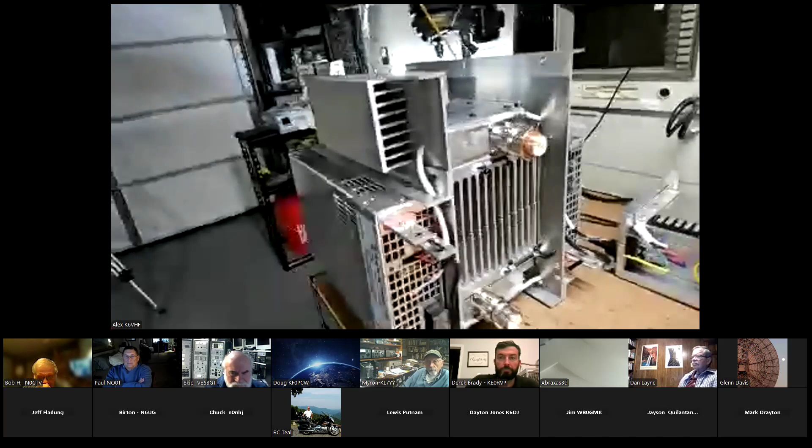So I want to show what we have right now. So I'm going to switch my camera so everyone can observe what the EVE-25 system looks like. This is the first time I'm going to do that. I'm going to switch the camera. So this, and you guys, if you have any questions while I'm talking and showing, please interrupt me and ask a question. So this is the main unit, so-called the transmit unit.

That's the heaviest one. I barely carried this with my two hands. It's about close to 70 pounds because there's a lot of metal there, and the power supply and SSPAs themselves weigh a lot. So it's mandatory two-person carry because there's no way one person can handle it. I'm just barely moving it from table to table. That's all I do. I'll add some side handles, so it's easy for transportation and moving around.

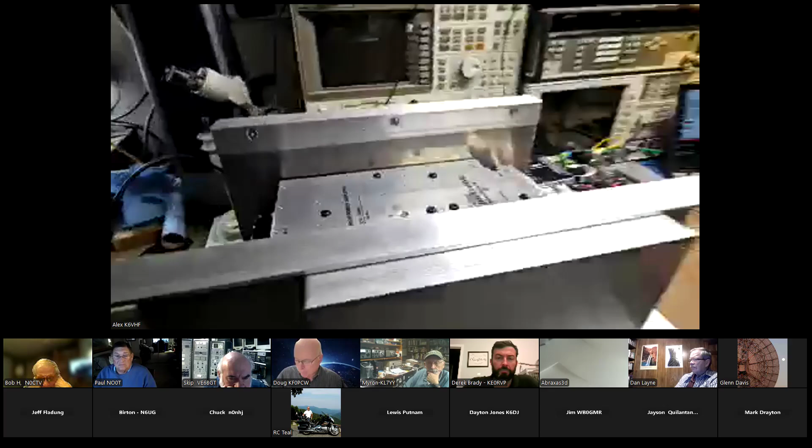But this is a unique design and a unique system. I think one of a kind, I don't think that any amateur radio operator ever built a system that's capable of doing 2,000 watts at 1296. So I'm really looking forward to the system firing up.

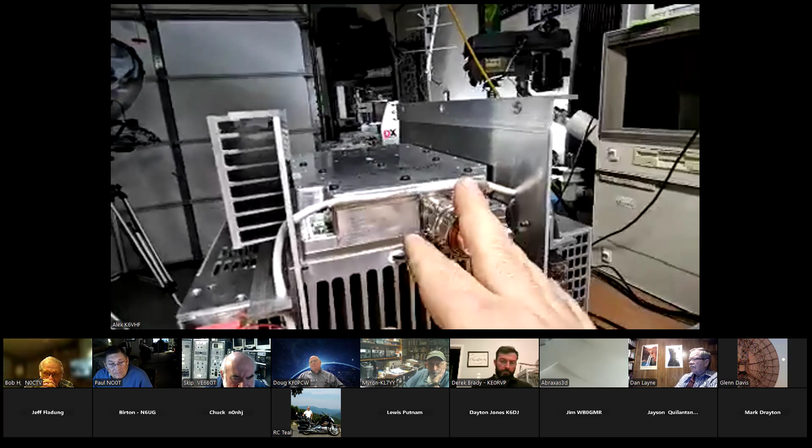I'm pretty close. I just finished wiring up today the control systems and inserting the temperature sensors, because protection is essential for me, to make sure that we're not going to find the system or the SSPAs burned. First of all, they are located in a very easy access and convenient place. So if we do need to replace them, all we need to do is unbolt all these screws and it all comes out. I didn't bury them under the metal, so that's easy in case something goes wrong. It'll take probably an hour to replace, but it's capable even in the field as well.

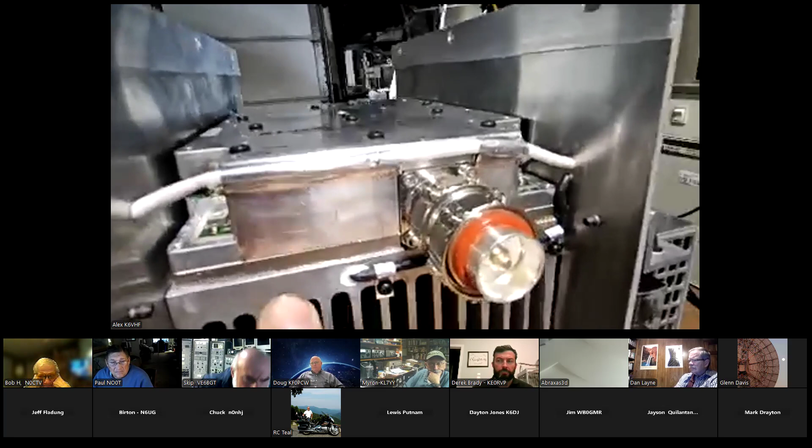So I added some temperature sensors right inside the heatsink. It's about 5 inches inside. I drilled a hole for the temperature sensors for each heatsink. So real-time temperature monitoring, and I have 8 sensors in total. This is the outputs. During the test phase, which is going to happen in a few weeks, we're going to be testing each amplifier separately until we get the nominal measurements and the calibration for the power and protection. And then we're going to add the combiner.

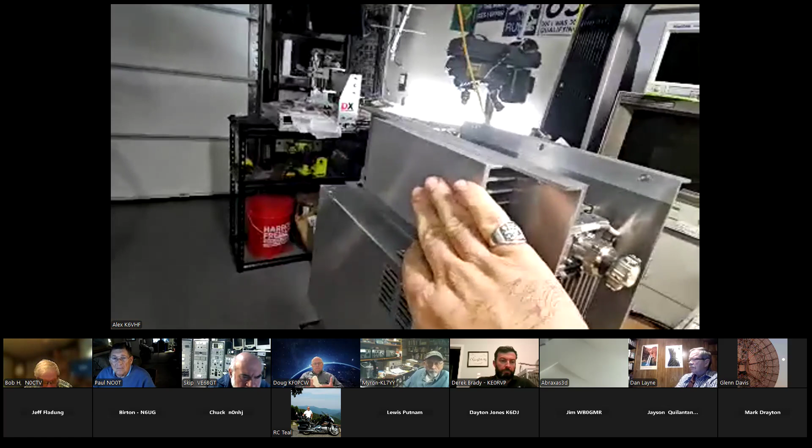I'm waiting for the driver amplifier right here. That's going to be mounted, and it's going to drive these 2 big amplifiers. That part didn't arrive yet. So that's the only part I'm missing to complete the whole assembly. The last thing I'm going to do is the combiner.

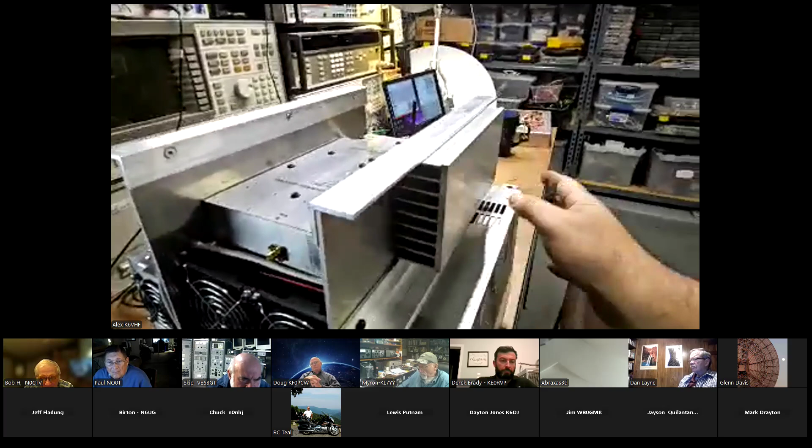Yes, there's a lot of fans in there because we want to make sure the cooling system is capable. Each power supply has its own built-in cooling system, as well as protection, which I'm going to route from each power supply directly to the control unit. And two fans are controlled by temperature sensors, so they're turning on and off when it's needed. And the other 2 turn on only when you transmit. So when you're on receive, nothing is turned on as long as the temperature stays below a certain amount. So this is the main unit.

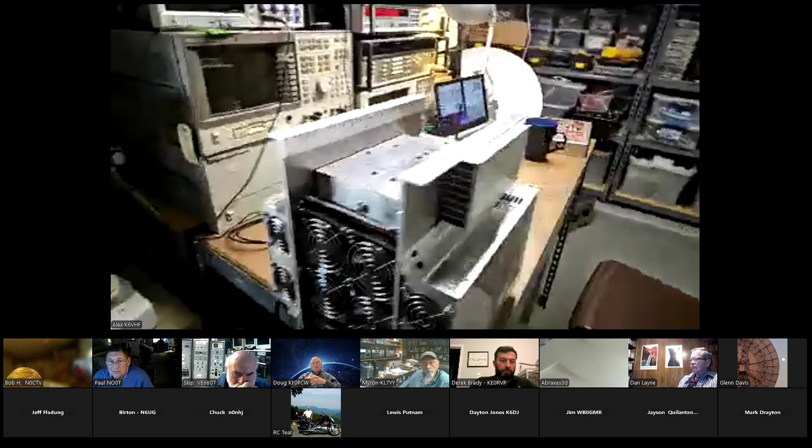I made this chassis on top so we can slide other boxes right on top of here. In case that won't fit, because the whole assembly is about 18 inches, if that won't fit in a hub, then we're going to use those boxes separately. So any questions about the TX unit?

Alex, we could use those temperature sensors for monitoring as we get close to the sun. We can see how we're doing when we track close to the sun. Absolutely, because I have 8 sensors provisioned. So I'm going to use probably no more than 6 for the assembly, because I want to measure the temperature of each amplifier itself. I want to measure the temperature coming out of the heatsink, the so-called exhaust, and also the input, which is the ambient temperature. Those are essential so we can calculate.

By the way, I also have a relative humidity sensor, so we can calibrate it to a specific amount, because I don't want the humidity to rise to a certain 90% or 80%. Am I going to cause a problem with electronics that is not protected? So the system will shut off each of the power supplies and amplifiers automatically.

I'll talk a little bit about the monitoring system later, but this assembly is unique because it has real-time monitoring, telemetry, as well as protection. Protection is sophisticated. You have multiple layers of protection. My goal is to protect the investment, so we make sure we operate, and whatever happens, it will protect itself. So I'm probably going to have 2 additional sensors reserved for anything we need.

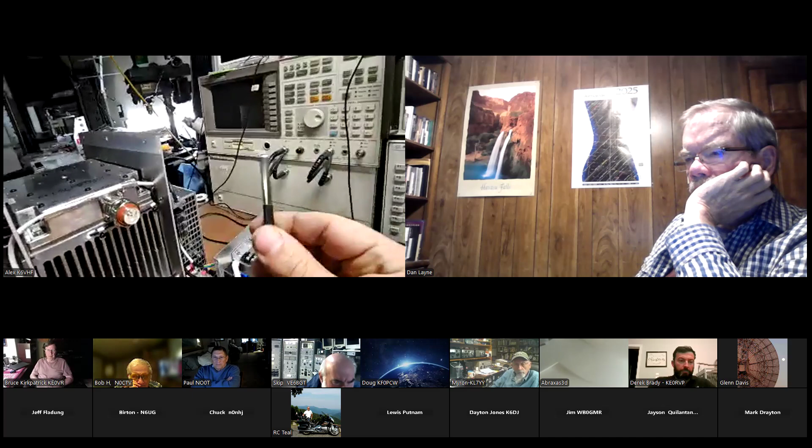We can place them. They are like here. They're like this. So this is the temperature sensor. The sensor is inside a shielded enclosure, so we can place it somewhere we want to measure. We can do real-time measurements. Any other questions about the transmit unit?

Can you identify where the power supplies are located, where the transverter will be? The power supply, we were talking about inside the hub? No, where you have them physically on, right? You identified where the amplifiers were, top and bottom. Now, power supplies are located on each side of the package. That's correct. Yeah, the power supplies are on the side.

Because what's the current? 60 amps each one capable. Each amplifier's maximum consumption current is about 50 to 53 amps at maximum power. We don't need to run on maximum power. Well, I calculated a little bit more just in case we need to supply, but we're probably going to be running about 40 amps on each side. What voltage are you running on the amps? Voltage is 50 volts.

That's kind of smart too, because in case something happens, let's do the worst case, one amplifier or power supply gets damaged, we have full redundancy because we can still operate one unit. Or we can switch the power supplies to another one and run the unit. So everything is switchable, a matter of switching the lead from one side to another. So I made a maximum allowance so we can repair in a short period of time without significant impact to the design.

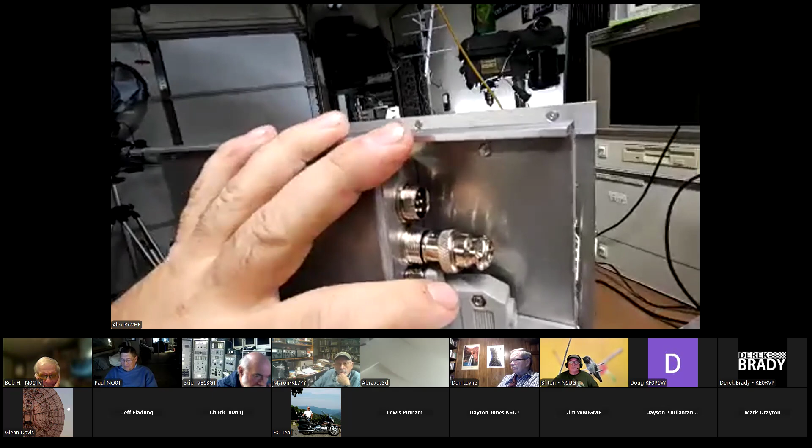I finished the wiring today. So let me show on the side. This is the control box. As you can see, all the cabling. By the way, every single cable is shielded. I don't want to take any chance of self-interference occurring inside. So every single sensor is differential and also shielded. Shielded cables go to the main box. So all these connections happen here. And you have 3 connectors going to the control, which include telemetry, protection, the signals, and everything in there.

I just need to wire up the control cable for the power supply. So I'm going to turn each power supply on and off individually from the software, as well as use the internal protection signals to my system, to make sure the system is healthy before we engage transmit. And in case something happens, the alarm signal and emergency shut off happen within 20 milliseconds.

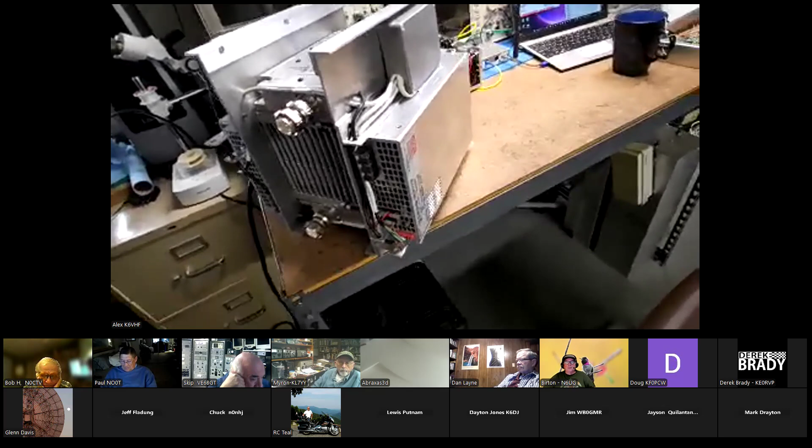This is very essential, better than any mechanical relays can give us. It's all based on the MOSFET transistor. So in case of high SWR, high temperature, unexpected low or high power, everything triggers the system.

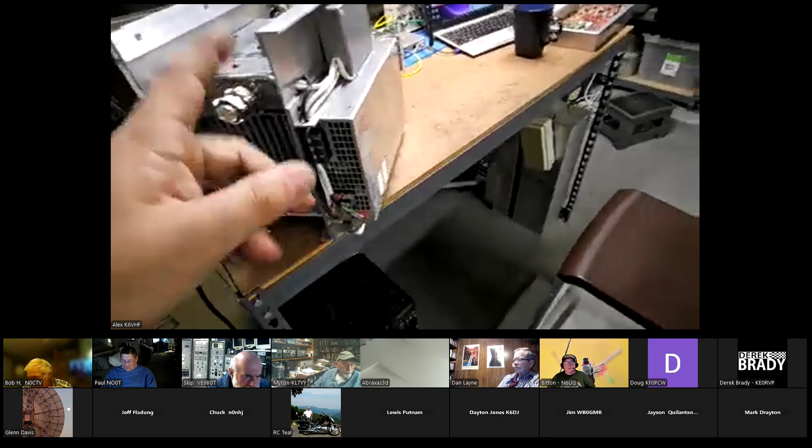What I also did included a system, because guys, remember, it's a lot of power capability. With our antenna, we're going to generate 80 million watts as effective isotropic radiated power. So it's a very big concentration of energy and power density in a 0.8 degree beam width. We're going to make sure nobody will be allowed outside within the antenna.

So I'm going to add a buzzer, which is going to indicate sort of like an alarm, audible from our side anywhere, so we know the system is engaging and give people an alert that the system is going to be on. So all those provisions are already incorporated in the system.

Any other question about the transmit receive unit? Yeah, Alex, you said that if it didn't fit for any reason, you could remote part of it. What was the part you could remote? The power supplies? Oh, no. This whole thing will fit, no problem.

This is essential, and I made it specific way, Bill, that it will fit in the hub. So we just need to think how we're gonna mount it. We need to have sort of like a rail so we can slide it into the hub and keep it in the middle, kind of create a CG somewhere in the middle of the feed assembly.

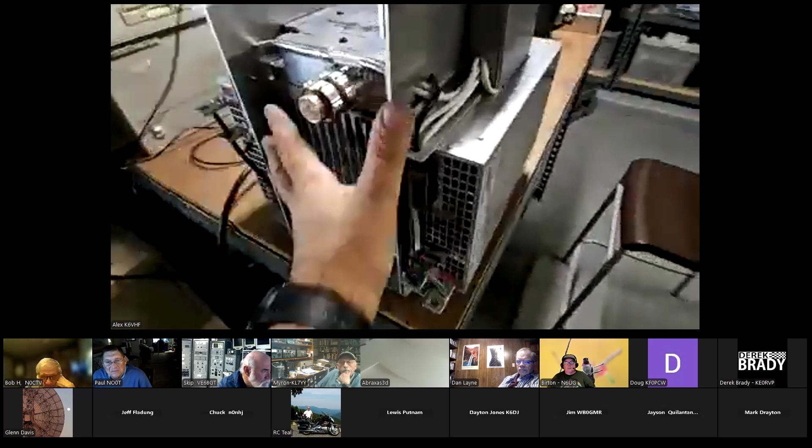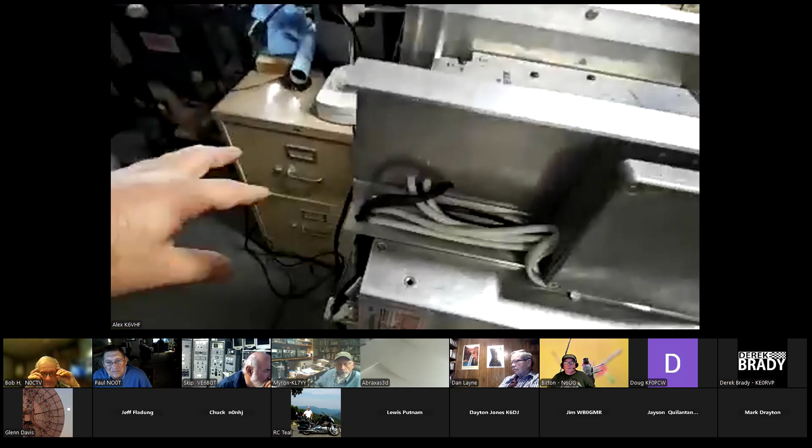So that face should be as close as possible to the transmit port on the feed. So this is faced towards the feed point, and that would be faced towards the cover. Now these fans are sucking the air and blowing here. This is the only way we can maximize the cooling system, because I need to take hot air outside, not inside, but I still need enough cold air on the back.

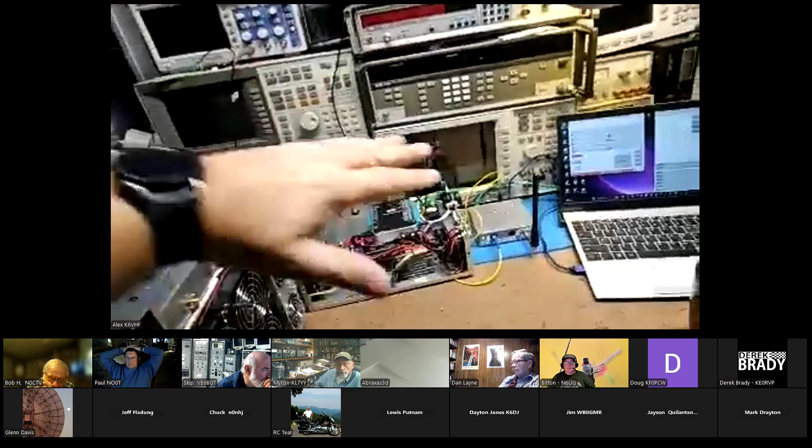So that is my concern, because it depends on the elevation. Let's say at 45 degrees and higher, the hot air - because the whole system is going to be pointed upwards - the hot air is going to be trapped on the top, which is where the fans are. So I don't know if this...

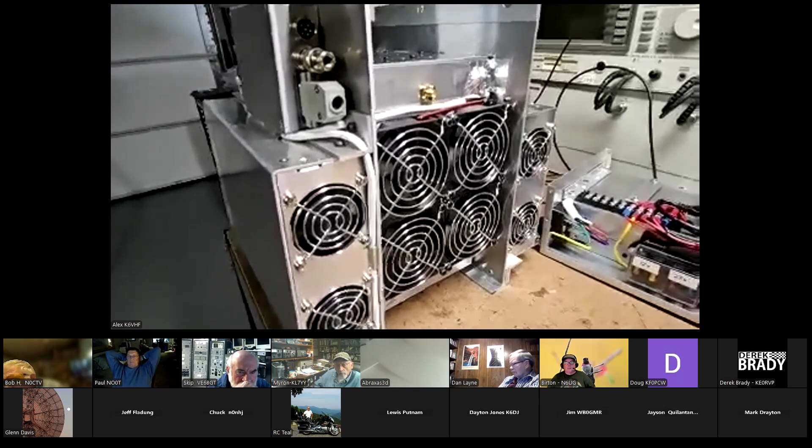...would be sufficient airflow. But the worst case, what we can do is remove that plate that we have, and install it open or put a mesh one in there, so that will allow the cold air coming from the top of the hub. But that's only if we have good weather, no rain and no high wind with dust. So that's one of the options we can do to make sure.

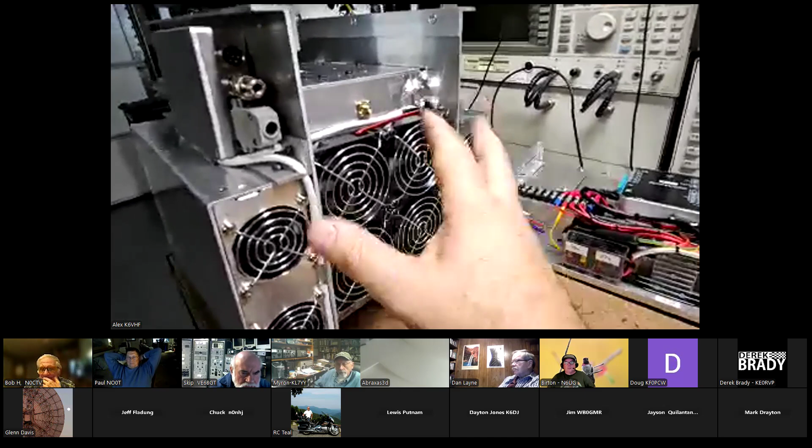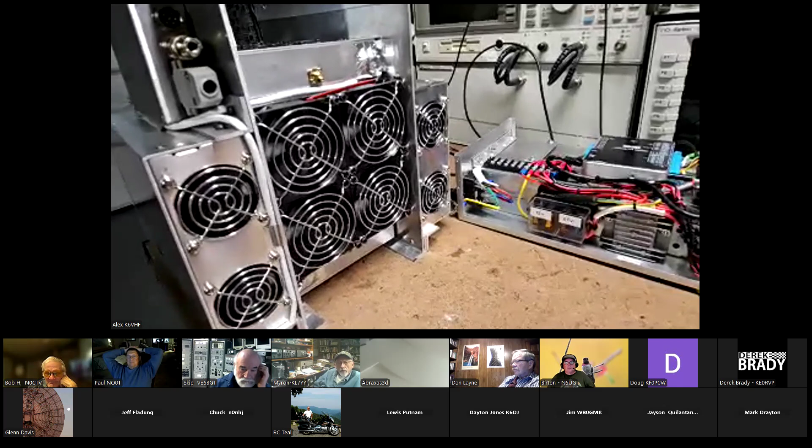But I don't know at which elevation we're going to be running the EVE 25, Venus elevation, we're going to be actually attempting. So that's still open conversation. Any other questions about this system? Is an air filter necessary to keep dust out, or would that just reduce your airflow as well?

There is a possibility that we can remove the screen and insert something like this that I have here. It has a filter in there, so that will keep out all dust, like in computer systems. It's easy to install on each one because it's exactly the same diameter, and that can be done without any impact to the system. You just remove 4 screws and install that filter, and we're done.

Where's your transfer, your LNAs going to be at? The LNA would be mounted right at the feed, same way as you see here. This is the feed, identical to the one we're going to be building, but you're going to have slightly bigger 7/16 connectors. The idea is a metal box attached to the feed with the relay, isolation relay, and LNA in it, connected directly to this system.

Next March, when we're doing this, Venus will be coming up around dawn. It'll be up all day and then set in the evening, so it's going to be kind of like tracking the moon. You'll use all elevations. Okay, good to know.

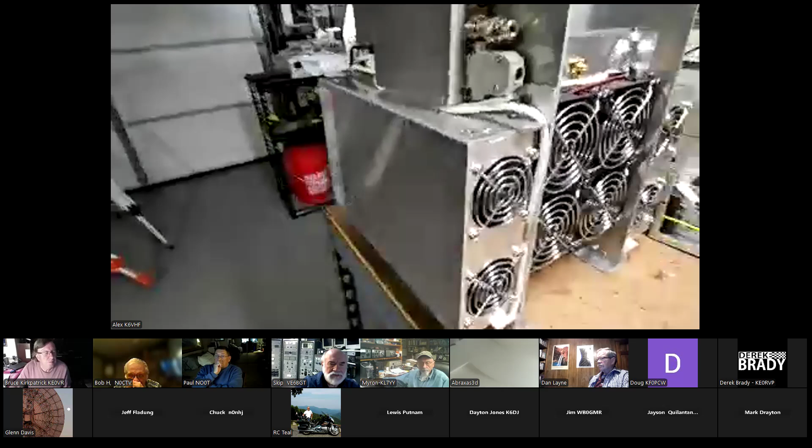Any other questions? I have a legal question, not an engineering question. Is the maximum power we're running more than the normal legal limit for ham radio?

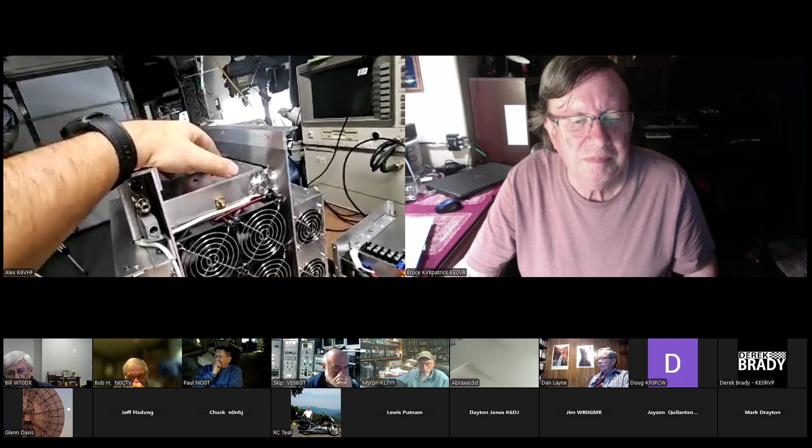No, it's 1500 watts. This is our goal to generate, but that doesn't mean the system should meet exactly 1500 watts. We can have 2000 watts capability to overcome possible losses. The system is designed that way because we don't know what the loss is going to be, especially with a combiner, cables, and connectors. So to make sure when we connect the whole system, we can supply an amount of power equivalent to 1500 watts at the feed per legal FCC regulations.

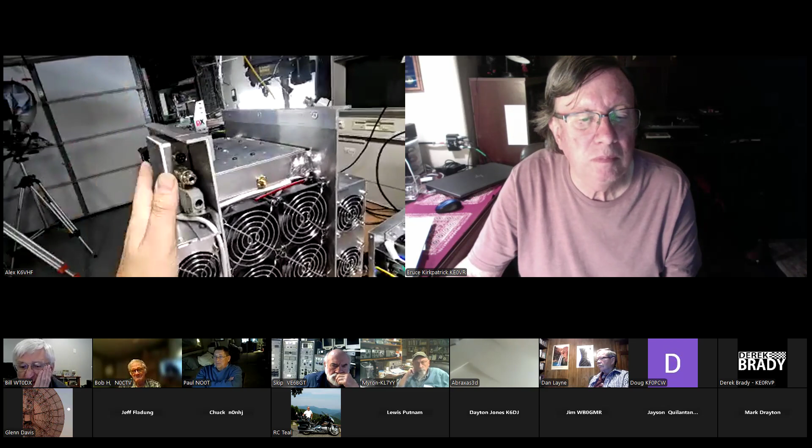But also, each amplifier itself is about 1200 watts, so we estimate about 1800 to 2000 watts coming out, which we can always reduce by adjusting the driver level. That's how I'm doing it - it's called a programmable attenuator. I can control it from the software, so I can choose the amount of power going to the amplifiers.

Another thing is the temperature characteristic, because we don't want to run amplifiers at 100% duty cycle, especially running Q65 for 3-4 minutes. To make sure the amplifiers stay relaxed, they run about 60% or less duty cycle, with the provision to add more power when needed, because when temperature rises, the power drops due to efficiency.

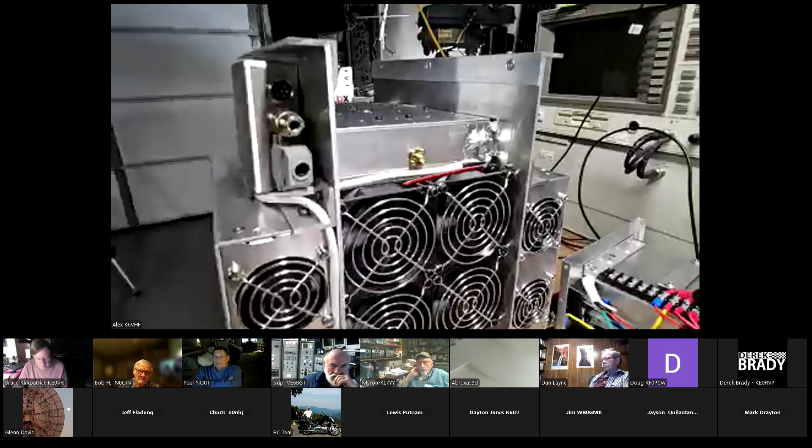Any other questions? You said you'd drive it with a 20-watt amplifier, which will go on the side there. The 20-watt amplifier is going to be here, with a coupler here, and a programmable attenuator so we can control it and choose the right attenuation. The reason I'm doing this is I don't want to climb up and down every time - I want everything fully controlled from the computer.

So that's why I'm going to add that, and we'll control this from the software. The 20 watts is enough to reach the maximum power by reducing the power of the driver amplifier, or terminating so-called ALC, automatic level control, same as you have on an HF radio, which will limit the amount of power going to the SSPA. So these are the inputs right here, connected to the hybrid splitter, mounted on the side, and that's how we're going to control the output power.

Is that a Kuhn amplifier, 20-watter? No, it doesn't generate enough. I'm saying, is that a Kuhn brand, from Germany? No, it's one from the Netherlands. Remember what we ordered? That one did not arrive. It's a small module about an inch tall and 2-3 inches in length, but that part didn't arrive.

It's going to be mounted on the side. I'm waiting to finish the wiring, and as soon as it arrives, the system is going to be ready for power up. I'm going to power the power supplies first to make sure they're turning on and off, and I have telemetry coming down before I fire up, because it would need 220 volts. I don't have 220 volts here, since they run on 220, not 110. There's no way to have 50 or 60 amps on 110, so we need two-phase for that, and that's why we're bringing two-phase up to the feed. Any other questions about that?

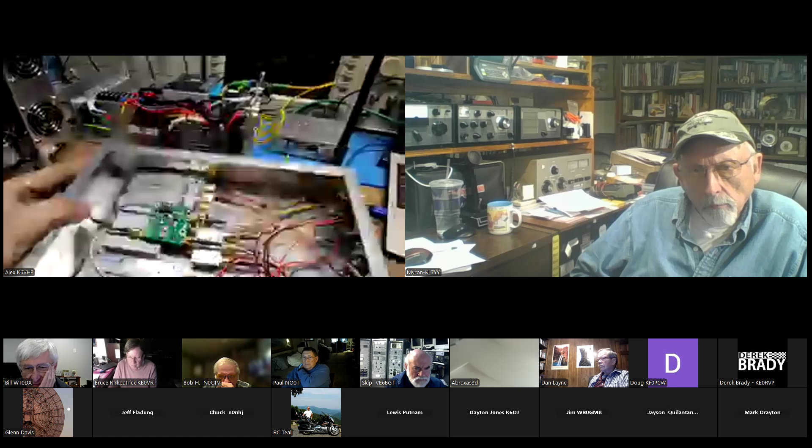So I'm going to move forward to another 2 or 3 units. Go ahead. This one is the most essential and kind of complicated, so we spent a lot of time on it. It's worth it. This one is not complicated, it's made as a sub-chassis, just a carrier with some connectors. Everything unplugs, and the whole thing comes out. Very easy design. We have two of them.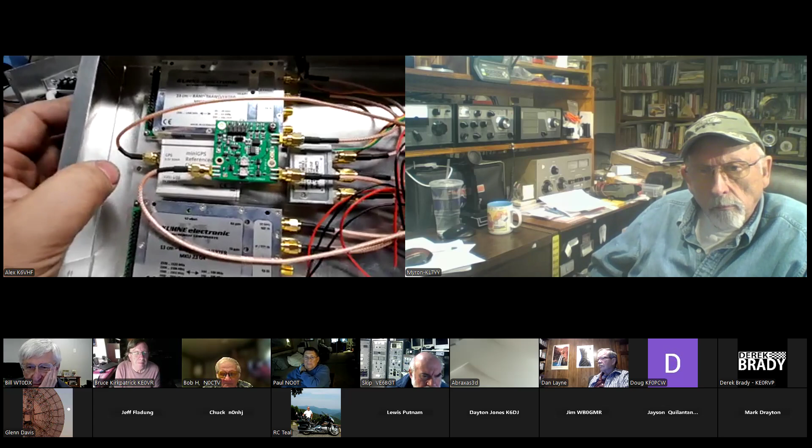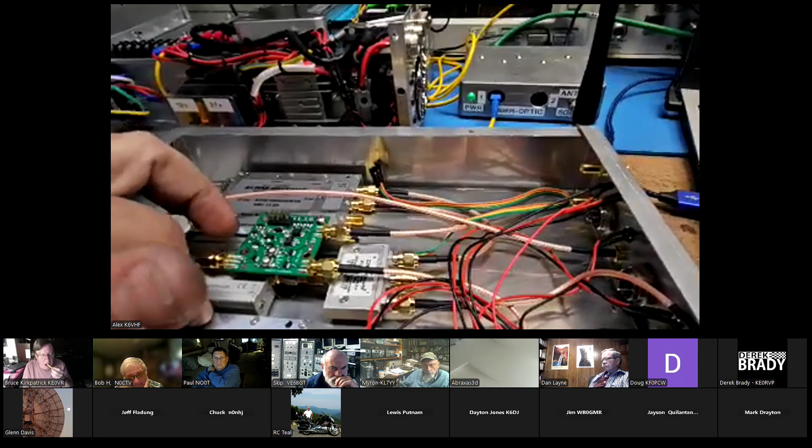I think you guys remember I mentioned we're going to have provision for 13 centimeters and 23, so they can do 2 transponders. They are fully switchable. They both feed the 10 megahertz reference, and they're also switchable by IF, so I just send the command from the shack and can switch between 13 and 23. The reason I'm doing this on this system is in case we design a 13 centimeter amplifier, both units will be controlled by the same unit. We don't need to design anything beyond the power amplifier. So this is a dual bander with all identical controls, and that's all wired to RF2, the main system, as well as to the shack and the control system.

So very simple design, nothing extraordinary. For the 10 megahertz, I have a splitter, so I have extra 10 megahertz coming out, feeding one and another. I have control, and we're going to have some low DC voltage regulators, and everything is just a matter of wiring these things up. That can be done anytime. I'm not worried about this, it's low priority for me. The top cover goes on top, and the whole thing is mounted this way, so you can connect everything directly to the system during the test phase. Any questions about this unit?

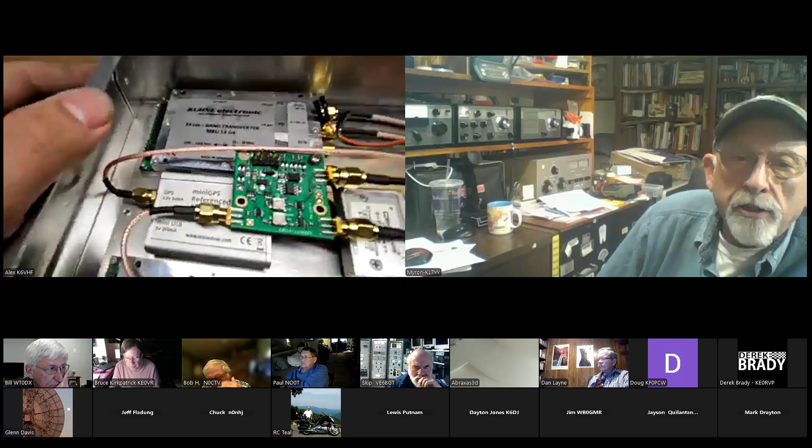When we were talking about developing the system, Alex kicked around the 23 centimeter one, and the discussion we had with the group, the EME group, considered going to 13 centimeters, 2304 megahertz, but what we planned on was 1296. So we decided to go ahead and put the capability for 13 centimeters in that box, and it's minimal cost to do that in the overall project. It wasn't really that much extra coin to add the 13 centimeter, 2304 megahertz.

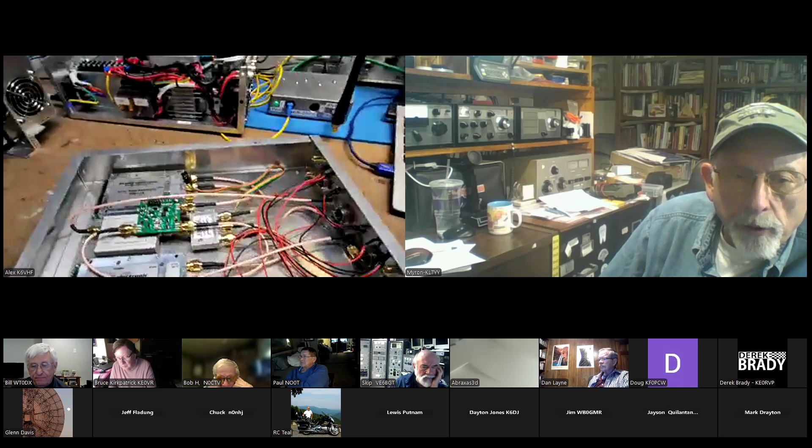That's correct. And we also have LNA systems, so we're going to have the LNA assembly, and we have the transponder. The only thing we're missing, and we had a lot of conversations about that, is the amplifier. There's no way to find a 1.5 kilowatt amplifier for 13 centimeters, and that's the biggest one, which makes about 250 or 300 watts. Yeah, exactly, and that 250 watts I found that we can actually buy, but in order to reach 1500 watts we'd need at least 6 of them combined, which kind of overcomplicates the system. It's going to be a lot bigger than this.

So the solution is either to have a TWT amplifier, traveling wave tube, but unfortunately they're not around, and the commercial versions cost about twice more than the amount of money we got for this EME project.

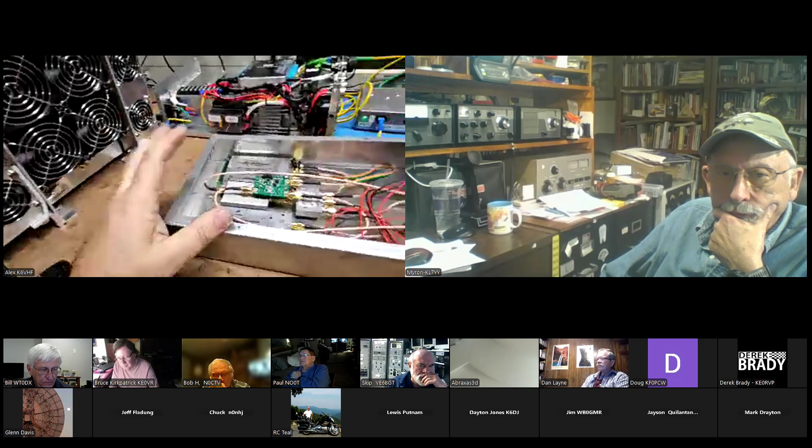So it's absolutely unreal for us to do that. But in case we find a way in the future, we'll come back. We'll have 13 centimeters already implemented. We'll only need to build the amplifier. Everything else is ready. And that was my idea behind it.

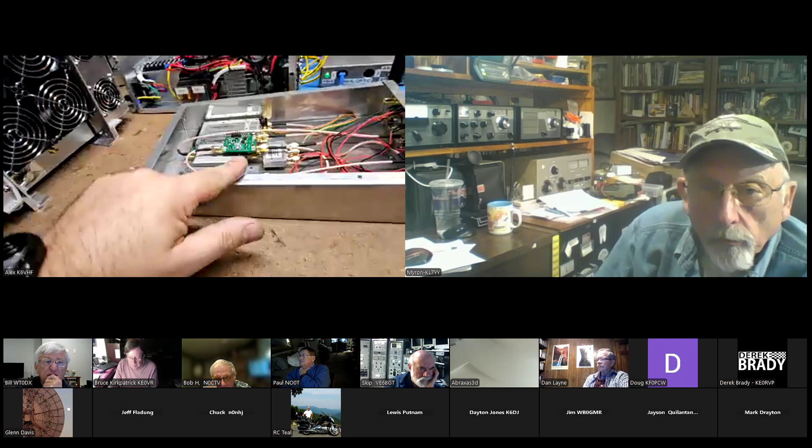Let's put this low-cost part in now. So we will have that, and we don't need to redesign the system. These two systems will stay identical. The only thing that's going to change is the amplifier, which is going to be an additional amplifier. Any other questions about this system?

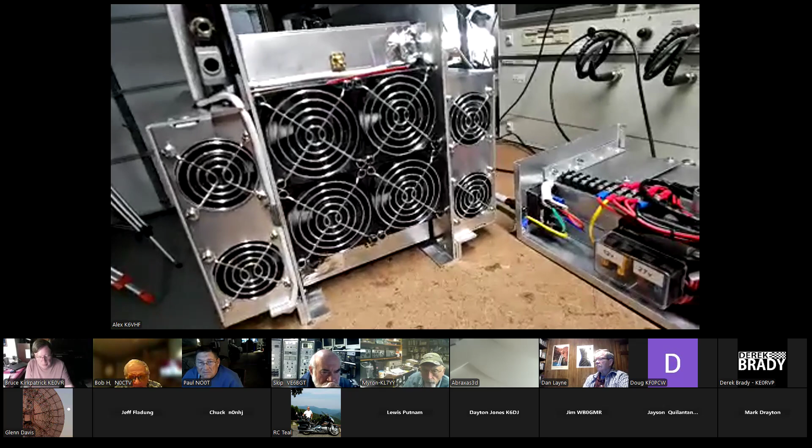All right, so this one is the cool system. This is a unique system. I call this the control box. If you remember, in the early stages of the proposal I had a block diagram of the entire system, and I distinguished 3 main systems: the transmit module, the receive IF and transmit transverters called the RF unit, and the control unit. My concern was about choosing and designing the right control unit, because all of that is controlled by a single unit, which connects to the computer.

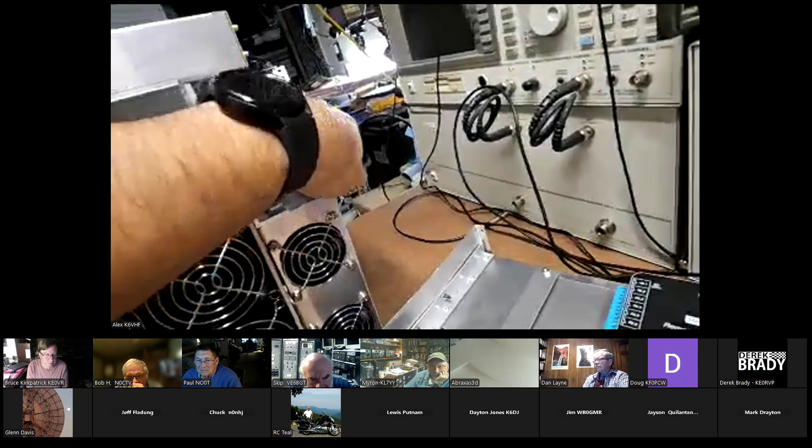So it has a 27 volt power supply, which steps down to 12 volts. It's all here. And there are 2 voltages distributed to all systems. We need 27 volts to drive the driver amplifier and some of the fans, as well as 12 volts to supply power to our receive system and the other modules we have here.

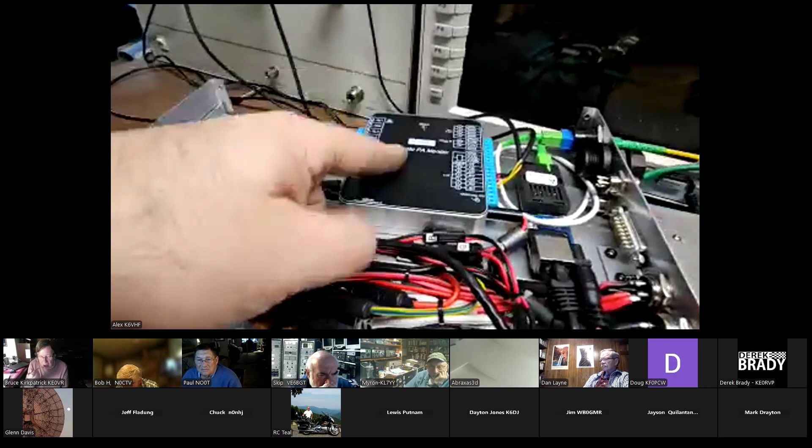So the main unit is the so-called REPAM. It was designed in Denmark. It's called the PA Monitor. It's open source, and you can do whatever you want with it for your purpose. So we've got this unit, and it controls everything, collects the data from everything. What I added to it is fiber optic.

So imagine that everything is controlled by fiber optic. And this is the fiber optic cable. This is what we're going to have from the feed to our shack. This is only one connection. Well, there are 3 connections. One is RF, because RF does not come through this cable yet. There are options, but it's all about the money. I don't want to spend money on that.

We can use the traditional way, supplying RF through our coax cable, which is low level, 28 megahertz. We don't really care. It's a piece of cake. And the PTT control line can also be done here, but I want to make sure we have a separate line for PTT. So that's it. No video, nothing. Everything goes through fiber optic. We just need to use the proper connections.

And this is the fourth box. This is inside the shack. It has an SDR radio in it, which we're going to use as an additional auxiliary SDR receiver. So we're going to have two signals received simultaneously: one through the main system using the ICOM 75, and a second on the SDR. That will allow us to look at the wide spectrum using QMAP 65 software, so we can look at the entire spectrum. That's why I don't really care about Doppler.

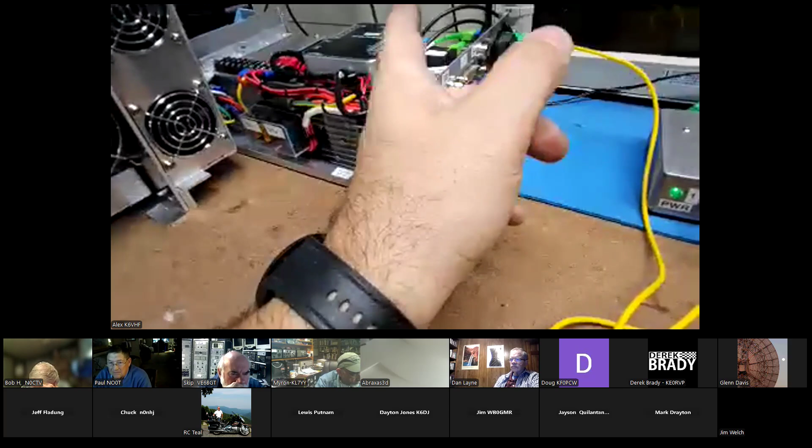So I just want to demonstrate. This is the module that's going to be inside our shack, just wired using fiber optic cable. I think we already have fiber optic. It doesn't matter what, as long as we have the proper connectors on the end. I'm going to flip the switch on the box. So right here, it's powered on.

We have some fans going on right now, and we have some LED indications. We have some LAN communication. We have a fiber optic on, and we have a system on. As soon as I flip the system power switch, it's automatically connected to my software. So I'm already monitoring the system.

Just for demonstration purposes, I put the temperature sensors. I have two of them attached currently for testing purposes, and I can see them right there. As you can see, it's reading 24.6 degrees, and the other one is 24.87. There will be 8 of them, and we'll have a separate name for each one, so we know which one is which.

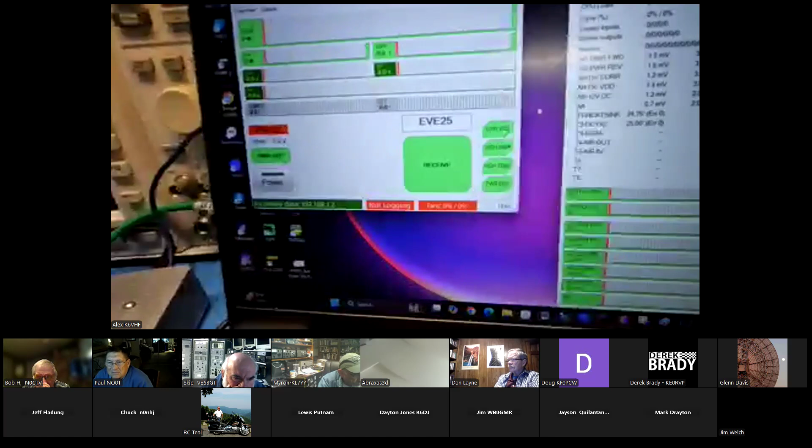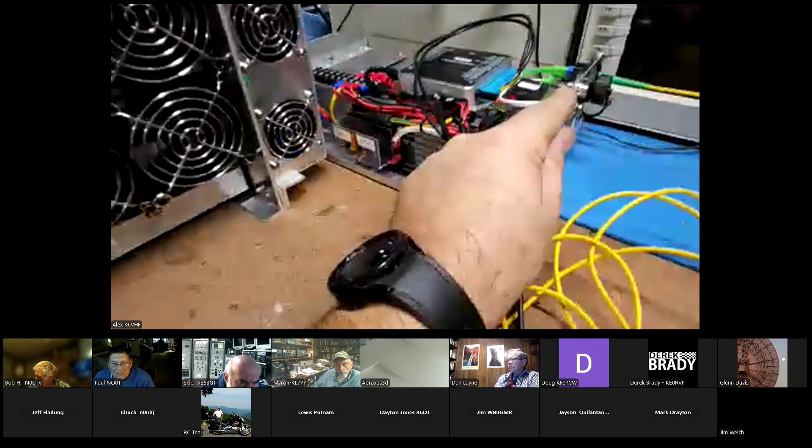All this data telemetry, such as current, RF power, as you can see here, your forward power, your reverse power, as well as the SWR, efficiency and the current. So we'll see all this in real time, as well as the relative humidity. Because the power supplies are remotely controlled, we just click on this button, and it's going to send the signal to the system, and it turns both power supplies on.

So in idle, we're not going to have anything powered. Everything is controlled by the software. So we'll have instructions for the operator on how to operate all of that. And we have some indicators. In case we have a high SWR, it will become red. It will trip the system off. And we're going to sound an alarm outside, with the system in protection mode.

In order to remove that protection, you just need to uncheck the button, and the system is reset. No more running to the pedestal and flipping switches off, nothing. It's all in here. So we have all the power measurements, as well as fan control, so we can turn fans on and off or set them at specific temperatures. As well, we have readings such as voltages. So I'm going to be monitoring 27 volts, 12 volts, and each of the power supplies' statuses. It'll give me the statuses here. So am I healthy or not?

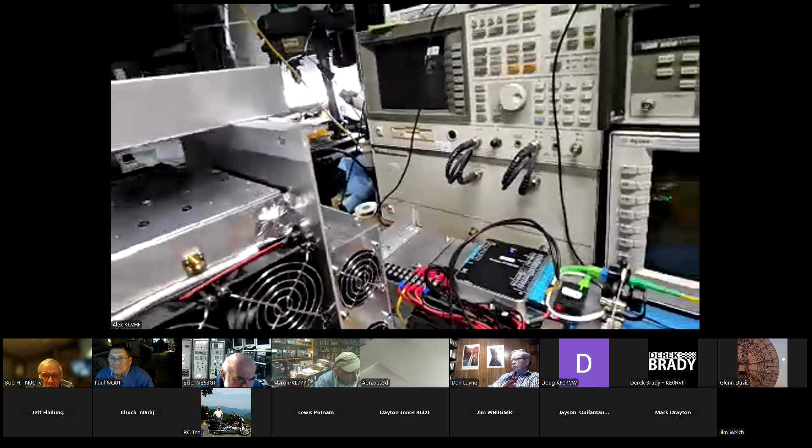And then I'll turn all my system on and off. I even can turn a signal source on and off here. So if you're going to place a signal source, we can activate it on and off. I have provision of 8 switches to use externally. That's our relay output. So you can wire up everything you want. One of them is going to be one big buzzer outside indicating that we are running signal.

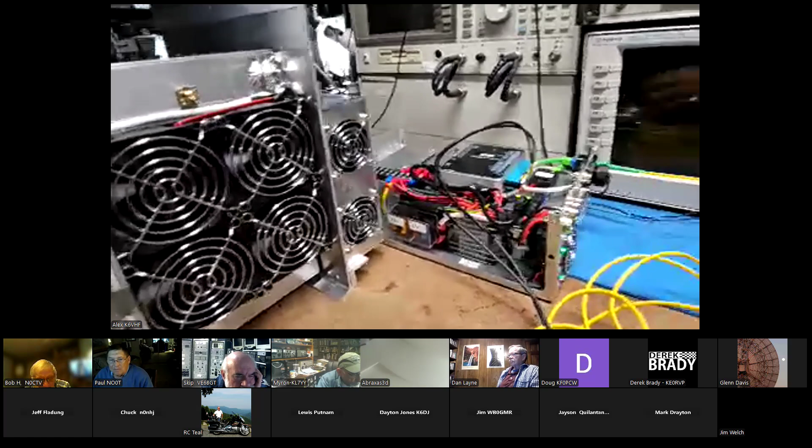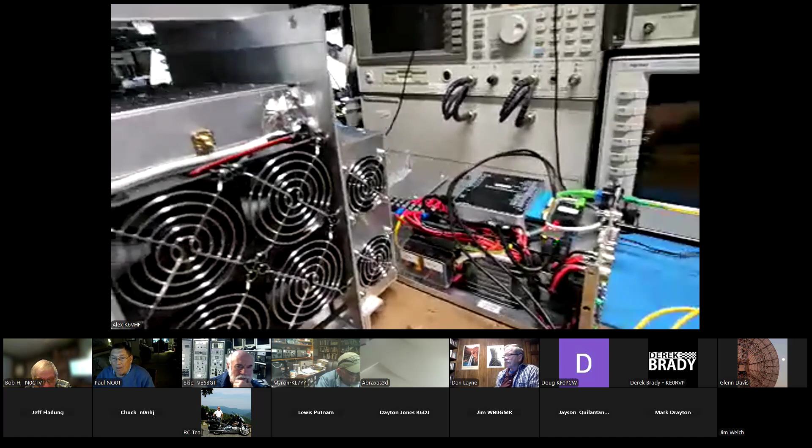So as I mentioned, everything is programmable. You just go in the settings and program everything you want. That will be done when the system is fully assembled. I will define every single parameter the way the system is designed. So we're going to make sure that no matter what happens, the bird, the rain, or something shorts, everything goes into fault in a blink of an eye. This system is meant to protect the most essential 2 boxes, which are the SSPAs. Everything else, we don't technically care. But if we lose one of these, we're pretty much down.

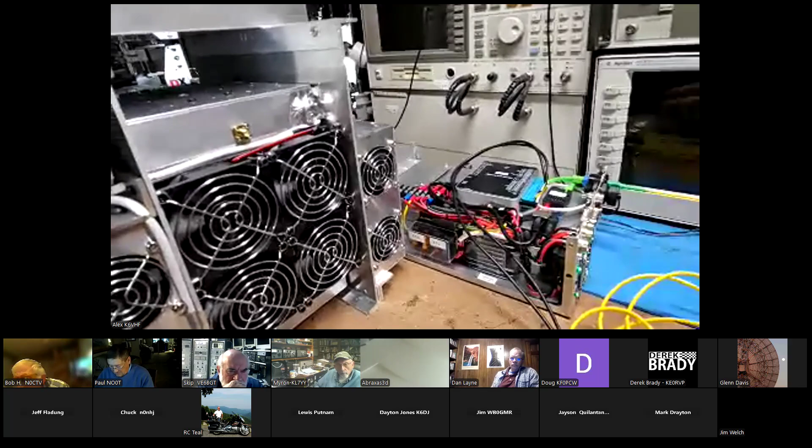So anyways, as you can see, this is the whole EVE 25, still in development stage. I'm kind of modifying things I designed on the fly. That's why I wanted to build everything here so I can change the design accordingly. So it's not going to be something that's built and won't work. As soon as I finish the system, it'll go to the test phase. As you can see, this one module is already done.

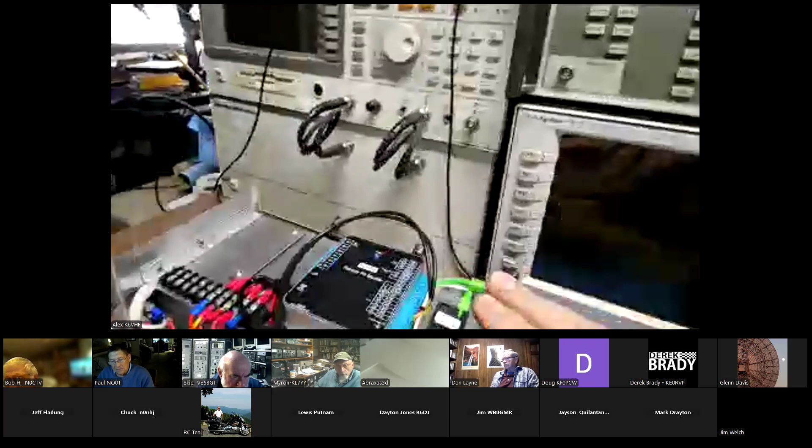It's fully functional. As soon as I finish wiring up the sensors to this box and defining the pinouts, I will define pinouts over here. I didn't finish that because I don't want to define any pinouts until the system is fully wired. So this goes first and then this goes next. And then that is the last one. But the whole system is fully functional. It can be shipped for testing, and I'll work on the feed and LNA.

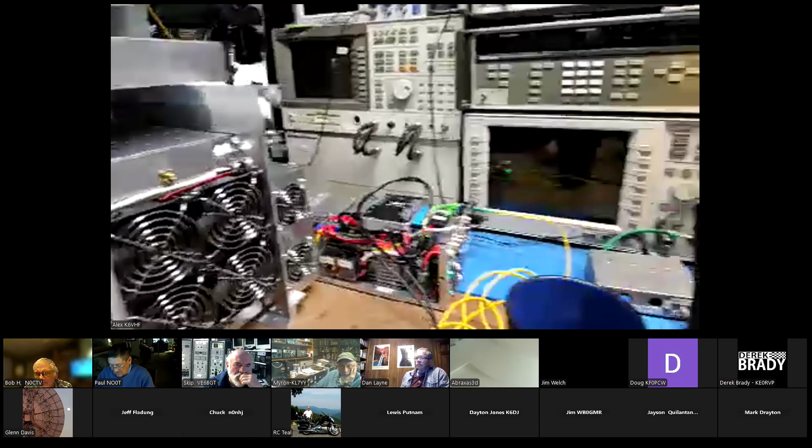So we still have plenty of time. We have more than 2 months to finish design and testing. All of this I built in 6 days from scratch. So that will give you the idea. All right, any questions about the software, control module, and fiber optic?

Totally amazing. 6 days. Yeah, well, I'm really excited because this is a one-of-a-kind system in the world that an amateur radio person built for the purpose we're intending. So if everything works as designed, that's pretty much what I'm looking for. That's why I'm putting a lot of time into the protection and everything else, to make sure we're not going to lose it in the first flip.

The only concern I have as a design engineer is the combiner. The combiner is the weakest part. Unfortunately, no commercial combiners exist. This is pure custom design; I have to come up with a solution. I have a preliminary design based on a rectangular square aluminum tube, which is going to have a solid rod inside. Everyone's familiar with that.

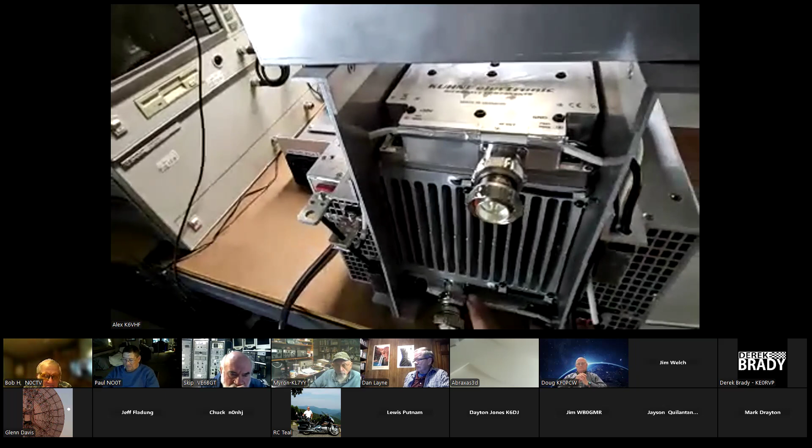And it's going to be 2 ways. You're going to have 2 connectors on each side and then 1 in the middle. That could hold 2,000 watts, but that has to be proved yet. When I get to that phase, we'll work on the test phase. But this whole system will be tested as a separate amplifier. I want to make sure everything works as expected with all protection layers before we combine the power. That would be the last thing we need to do to generate the ERP we need.

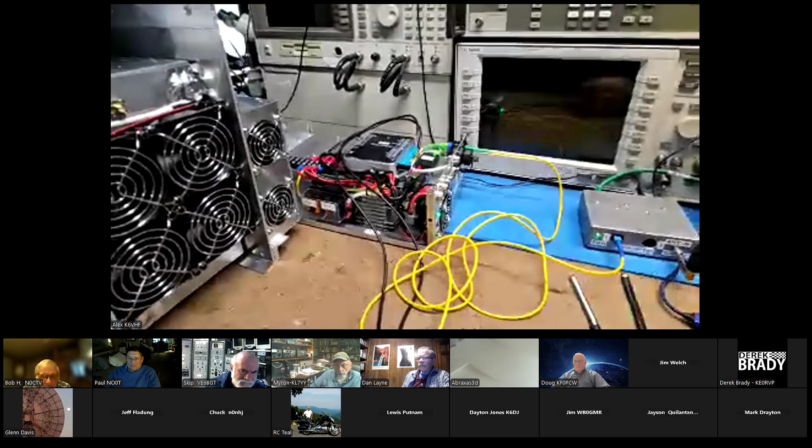All right, I guess I'm done here. More technical information is yet to come, because I need to work on the drawing and design package at some point. As soon as I finish the design, it will be implemented. But right now, I'm still flexible to move things around. So that's my low priority right here.

Okay, Alex, one more thing. Alex is the chief engineer. He lives in Chandler, Arizona. So all this is being done at his QTH in the garage. And he said it's much cooler in there now than it was during the 110-degree heat this summer.

Paul, N0OT, is the VP of marketing and also a board member. He is the chief guy in charge of the overall program. Alex is the chief engineer. And we have a cadre of 8 or 10 folks on an email thread that keeps track of things, where we can kick comments and suggestions around. So if you want to join, we've got a lot of talented people on DSES; get a hold of Paul, and Paul can get you tuned in on the right email thread so your input is available to everybody. We got a lot of suggestions initially, not much in the last couple of weeks, but we are open for comments and suggestions as we go on this project.

Being a one-of-a-kind project, I think Alex is doing a phenomenal job of getting this thing started. I'm only involved in writing checks and paying the bills. We had to order a bunch of stuff from Germany. We had some customs issues that held things up for about 4 or 5 days, and we paid about $250 in customs and processing fees to get it cleared. Everything is usually delivered directly to Alex's QTH. A few items came to Colorado Springs and we had to reship them down to his QTH. So that's how we're buying all these parts. Any comments? Paul, do you have anything you want to add?

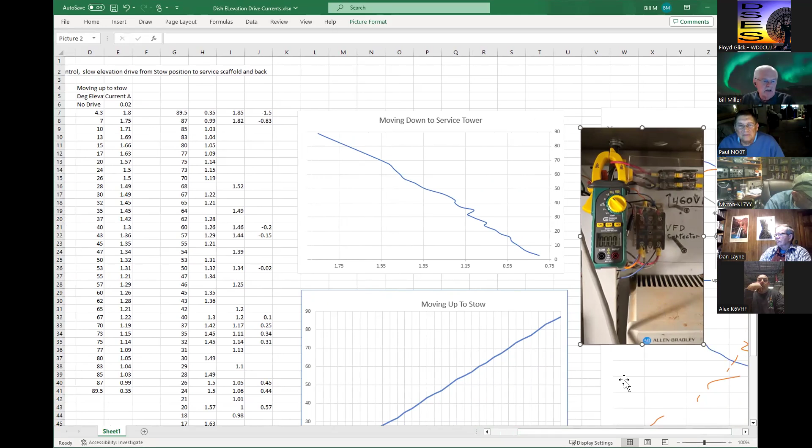And then we drove the dish in elevation only from the stow position down to the service position. And here's the raw data for that. And this is the plot. Now, these sharp corners in this plot are more my error in having to look back and forth between the elevation as indicated on the tower Raspberry Pi versus the current. And so if there's a little jaggedness here, that's probably error because I'm trying to concentrate on two things at a time.

But remarkably, what we find is that starting out from the stow position, it was pulling about 1.85 amps. And I believe that comes out to about something like 1.6 horsepower if we multiply everything out. And it is linear with elevation. This is elevation on this axis. That's 90 there, and that's 0 there. And it's not only linear, but it's a straight line curve.

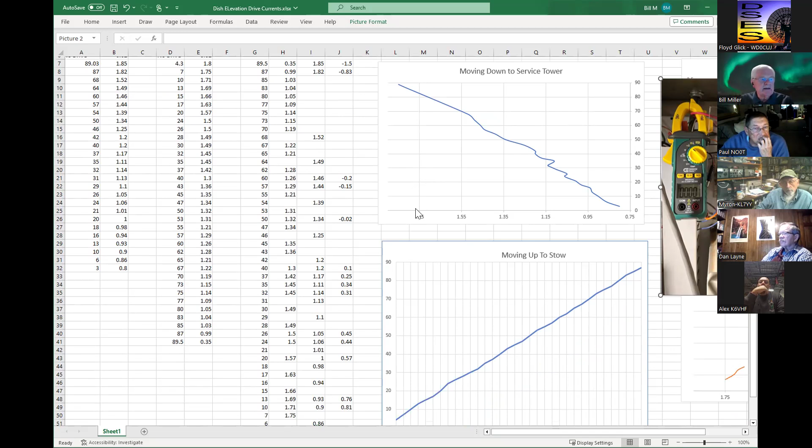And so I'm looking at this and I'm saying, okay, that makes some sense. And that would indicate that we think that the counterweight is probably heavier than the dish because we're pulling the counterweight off of 0. The other curve is going up. So it's moving up to the stow position from the service position. So here's 0 degrees and here's 90 degrees.

And remarkably, that also starts out at 1.75 amps and decays down to about 0.99 amps. So that's about 1.6 horsepower down to about something less than 1 horsepower. And that's also a straight line curve. If somebody wanted to model this, that'd be a place to start.

Now, we could take the dish and do more experiments with it, but what this tells me is it didn't perform how I expected it to. But it's performing in a linear fashion with a straight line curve, and we should be able to model that. I don't think that you'll need to add any counterweight. Let me ask you this, Bill. Were you using RMS? Yes, this is an RMS meter.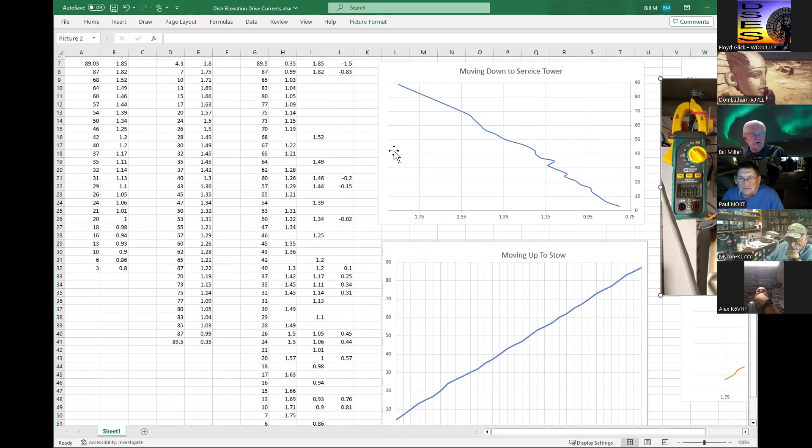That's what I mean. You're not considering the... am I on? ...taking the momentum and raising the dish to the up position if they are out of balance. Yeah, getting the weights off of ground zero going down to the service tower, this one makes sense to me. Going the opposite direction, it doesn't.

But I'm sure if I do enough research, I can figure out what model this is. It's basically a balanced beam model. Okay. And you got a mass 1 and a mass 2, and what you're trying to do is figure out where those are in the travel of this thing in 90 degrees of the rotation. Well, the weights are like a pendulum and they want that dish to go straight up. Yep.

No counterbalance in the hub. Counterbalance in the hub. If the weight of the hub is less than the counterweights total, they are going to go like a pendulum, and it's going to want to point that dish up. Yeah, but remember that the dish itself, there's a center of gravity of the dish, and we think the dish weighs like 60 tons, right? That 60 tons is probably a wrong number.

But at any point, there's a center of gravity of the dish itself, not including the counterweights, and then there's a center of gravity where the counterweights are. And you got those two centers of gravity, those are M1 and M2, and those are working against each other on a balanced beam. And so that modeling has to match this current, because this current represents force.

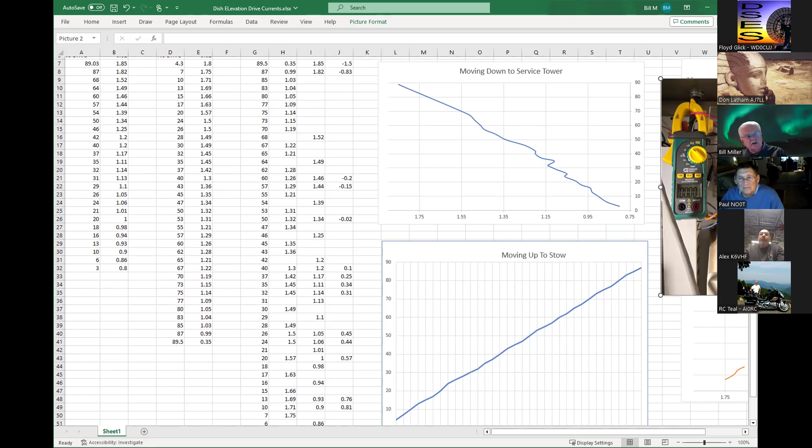That's the 460 volt bus into the inverter. That's the 460 volt bus right there on that red wire. And we got a linear straight line current characteristic that it should model to a balanced beam. You can run the same test by using peak value measurements instead of RMS and compare the data.

Well, that's one of the problems. We need to haul a whole lot more equipment up there to do that. What we'd have to have is a good current probe big enough to clamp this wire, a current probe amplifier, and a scope that we can record on. Most of the clamp meters have peak and RMS measurements, but I don't know which one you have, but it's all a matter of switching.

But I suggest just a simple current probe that generates the voltage based on the transfer impedance, and connect it to the oscilloscope, FFT mode, or spectrum analyzer, whatever. Because we're talking low frequency here, just monitor this and put in the peak value, hold the peak. Go ahead, Don. You can use a Hall effect probe to check.

Well, we have some Tektronix current probes. Ray just ordered a current probe. That's right. Ray's got a clamp-on current transformer that we can put into a scope. Yeah, that's the idea. Then the other thing is, don't forget, you have pretty high mechanical loss in that system. Yep. And I think that probably accounts for the difference in current at the beginning and end of your slope.

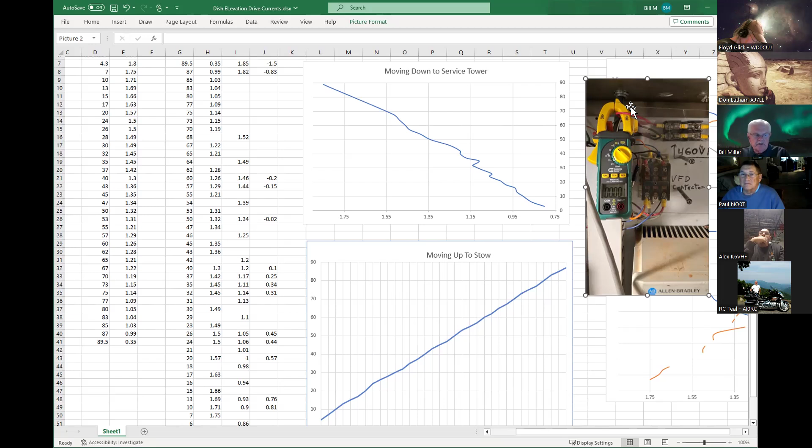Yeah, this could just be 0.9 at the top. And what was the beginning current? 1.8 going up. Okay. So I think you just got mechanical loss for about 0.9 of it. So you're saying it's awful high friction in the elevation drive to drive it up, and the azimuth is just a big bull gear, right? Yeah, so I think that's what this is.

There's two components of this curve. One is friction, and the other is the lift against the two weights of the balance. Exactly. And what Alex is talking about is the inrush starting to move it. It's the momentum, the torque necessary to get it going. Yeah, the angular momentum, and also the stiction of all the bearings. I'm pretty sure the stiction will be okay, and I think the inrush will be okay too.

There's nothing there that indicates... it indicates that almost half of the initial starting out at 0 degrees, that almost half of the current that you're using is going into mechanical loss.

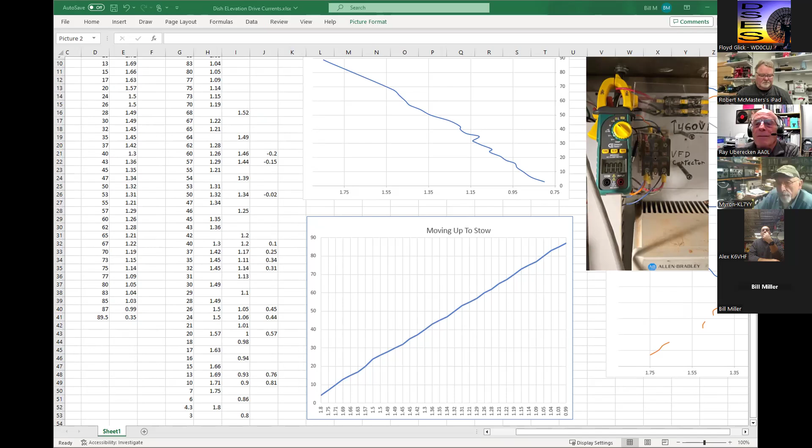So that 100 pounds we're putting up there's probably not even coming close to what was originally up there. Yeah, no reason to counterbalance 100 pounds. I think there's plenty of margin in this thing.

And that goes along with the electrical proposal. We're going to run conduit along the side of the fiberglass arms. That same area had 3-inch diameter copper feed line all the way up, as well as a waveguide, the original waveguide that's still up there right now. So that's 3 1/8 inch transmission line, right? RF, and that was pretty heavy too. You add all that up.

So I don't think the new proposed power line will even come close to what was originally hanging off that fiberglass. I don't think that extra weight's going to be an issue. So I have a quick solution to that.

I was just thinking it's actually very simple because you can disconnect the brake, right? Is that possible? Oh yeah, electrically. So you're gonna set the dish at 45 degrees, right?

You're gonna hang a chain or rope from the hub down, and we're gonna have adjustable weight. Just add 50 pounds, disconnect the brake, and if the antenna goes up, that means we have a lot more counterweight than the weight. So that one experiment mechanically will prove to us that the antenna is balanced, and all we care about is only 45 degrees.

Yeah, actually, because of the jack screws, I don't think it'll self-propagate to a high position. It'll just lock up on the jack screws. Okay, so that will prevent the dish from going to the middle.

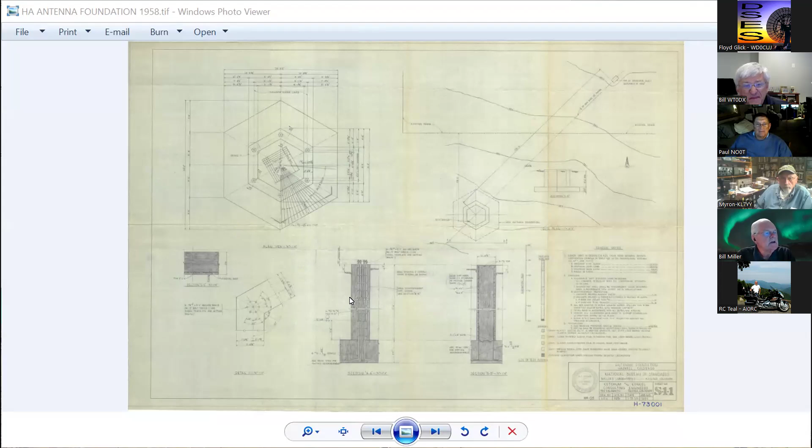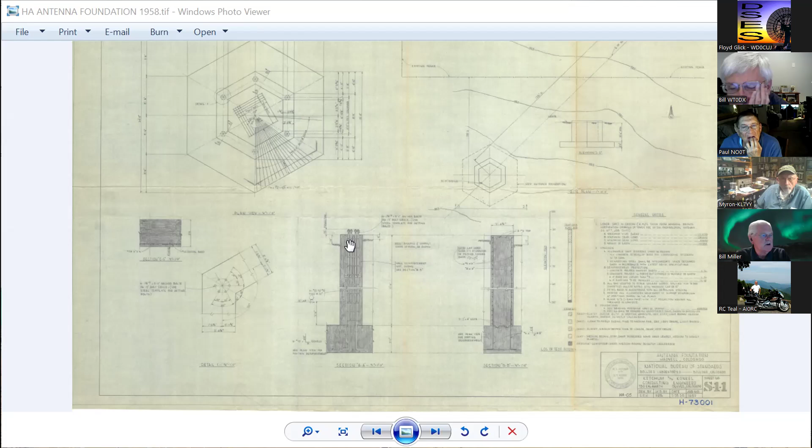Here we've got a diagram, a drawing, and the date on this drawing is like 2/28/58. And what this shows are the pylons or the piers that were poured in concrete about 14 feet deep on a footer, which are the location points or tie points for the dish. This gives us some insight into the structure of the foundation for the dish and what holds it down and has kept it in place and level for 70 years.

And I was thinking about these, and the thing that came to mind was we've got the 30-foot dish, and we've been discussing how do we build a foundation for it. We might want to examine this drawing and see if it's something we could use. There are 6 of these piers, and a ring goes around them that ties them all together, and the dish sets on it and bolts down to it. So that's one.

Let me kill that one. Yeah, those are 14-foot piers in the ground for those pedestals. And then there's a bunch of other stuff he sent us. There's drawings of the elevator that was in the 500-foot tower that was on site at one time, and we don't need that because it's no longer there. There's also pictures and drawings of a building that they were going to build that they never built.

Let me share this one. It's a subterranean building, or part of it is subterranean - it has a subterranean portion, like a bi-level, and then an above ground building. This was actually designed and put out as a proposal, but they never built it. So we finally built a building. This building was going to be built right at the edge of the foundation of the pedestal.

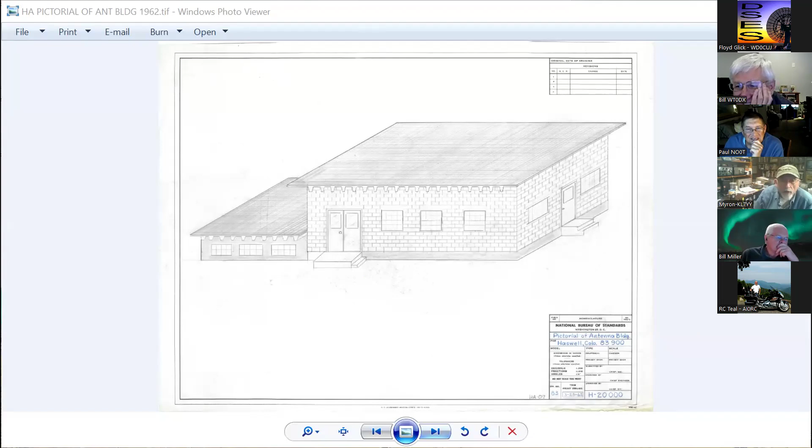The part that's sunk in the ground is where the dish would set when it was tilted over to the service position. In the building itself, there was a design for the roof to open up and a lifting device would come out of the roof and go up to the dish feed. So that's how they planned this - the building was designed to set right next to the pedestal of the dish.

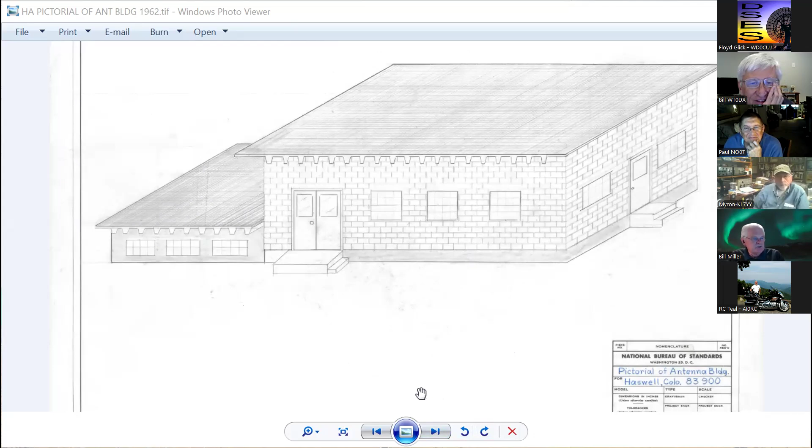I was kind of curious about what the subterranean part was, and that was so the dish could come down on top of it. Correct. Yeah, they could probably service the dish from the roof.

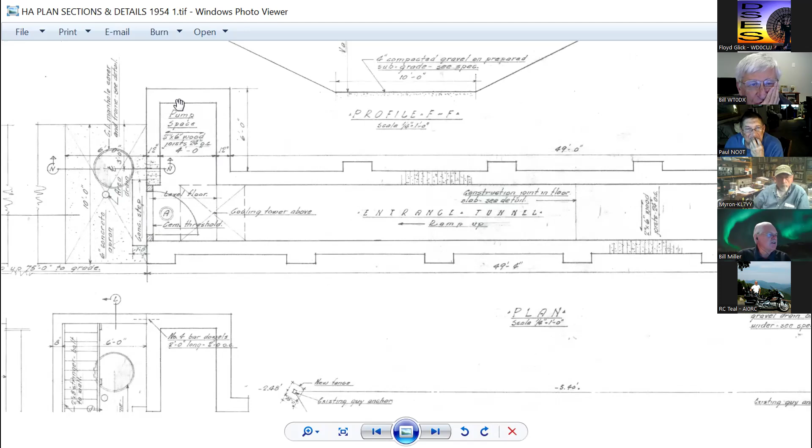And then there's what's really the treasure trove - all the pictures of the bunker. These are the engineering drawings of our bunker. This is the ramp coming down into the bunker, the entry hallway or ramp. This is that little storage area right inside the door. And this is the sump that's right outside the door, and the sump drain - that's the drain for the ramp water that would come down. The pump was in this area in the middle, where we now have a storage area, but we have a pump that's actually in this sump right now.

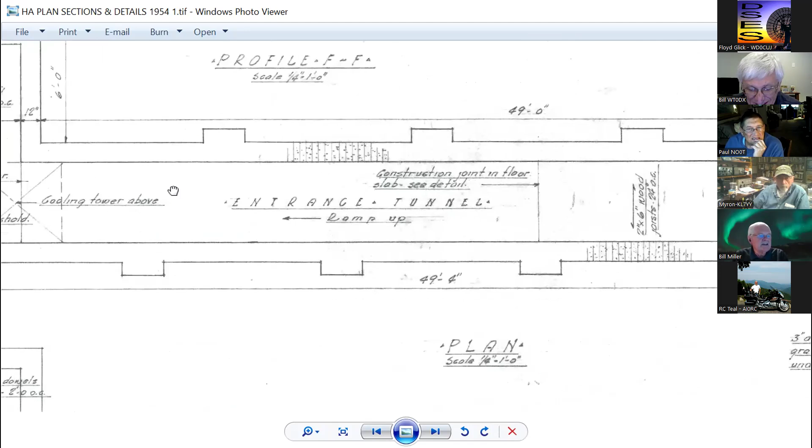You come on down the hallway, and there's the septic tank that was inside a chamber we've had open before. I've actually found the sewer pipes that come in and out of this septic tank. Then there was the machine room, which we call the battery room, which has the sump in the floor. And our batteries sit over here in this corner.

And then the bathroom is next to that, and they had a dark room next to the bathroom. It says dark room here, and we can actually see a discontinuity in the floor tiles, where apparently they had built this - there was a wall in here that's no longer there.

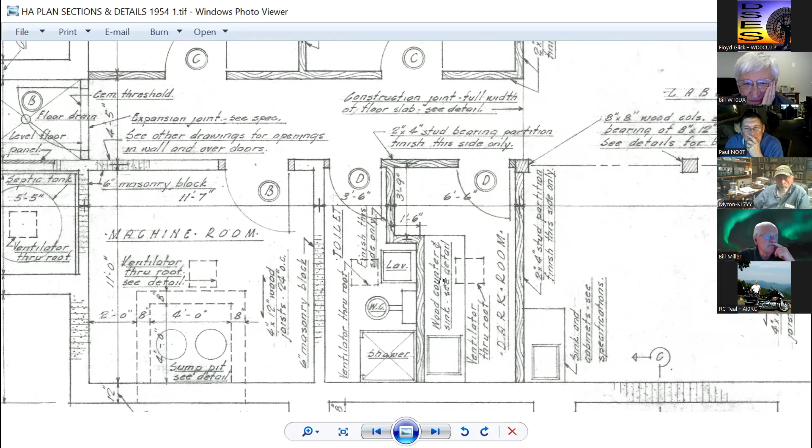So that dark room's not there, but we have our little kitchenette in that space. And then across the hall is the storage. This door does not exist. There's a door here, and this wall does not exist. And this is what we called the hidey hole that Ed Korn and Steve Block built for the bunkhouse in there. And then the big room is where we have the radio station now and all the other stuff.

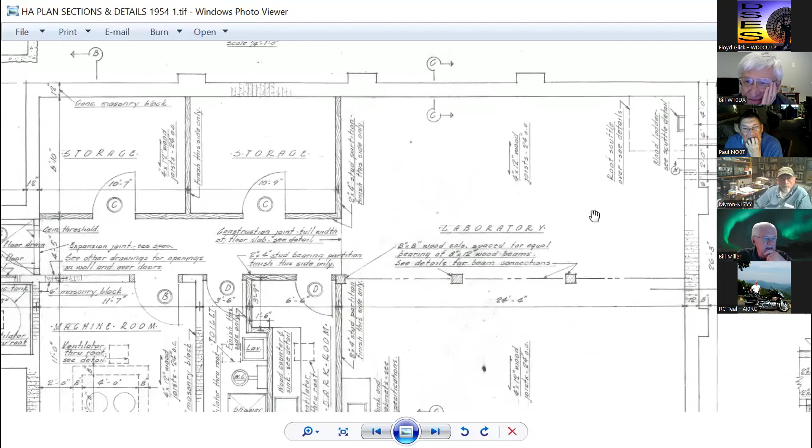So you see there's quite a bit of detail in these, and there's the elevation view of the whole thing, showing the ramp coming down and the septic tank and everything. So it shows how it was constructed. Unfortunately he didn't have any drawings of the dish, and that's what we're looking for now.

We found out that there's this company called General Bronze Corporation, and they're the manufacturers and designers of the dish. And apparently there was a problem where they didn't meet the specification. He told me there was actually a lawsuit filed by, I believe, NIST or ITS against General Bronze, and all the drawings of the dish were entered into evidence. So somewhere somebody has this information.

He suggested, as we've talked before, maybe in the National Archives and Library of Congress are drawings of this whole system and how it's put together. That would really be valuable, because there's a lot of things about the dish, like the counterweight, that we don't understand. So if anybody's back in Washington, D.C. and wants to go on a fishing trip, it'd be great to get hold of some drawings at this detail of the dish itself.

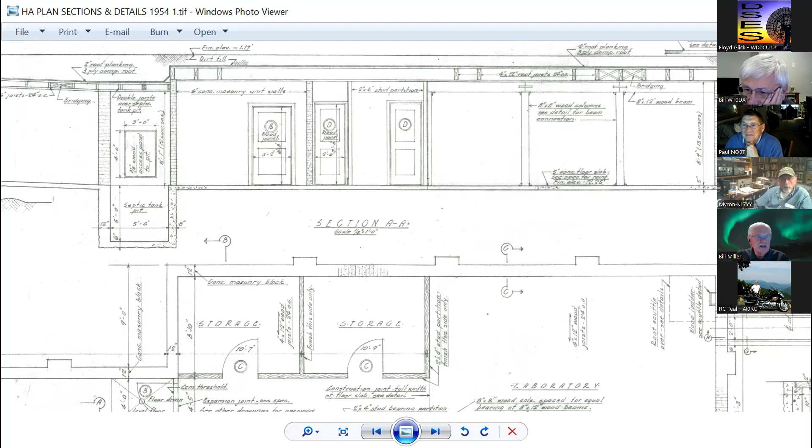We had about 15 to 20 of these drawings that were given to us. Yeah, there's 20 drawings, I can share that screen. But most of them don't have anything to do with what we're doing. Yeah, one of them's a land plot. There's the carriage assembly of the elevator, where you see the carriage that goes with this elevator. There's the electrical drive of the elevator. There's a lot of stuff about the hoist and the elevator.

And there's about 3 drawings of the various incarnations of the bunker, and then that new building. I wish we had more on the dish itself, but it's a start. These were given to us by Justin, and I gave him some information. He was wanting information on the Longmont T22, the two 60-foot dishes up by Longmont. So I gave him what information I had, told him I'd be still looking.

There was a lot of stuff initially on the old website, so it may be still in some archive somewhere, in some databases or pictures I may have. I'll have to search through a lot of the stuff I've collected over the years. So it was a real treasure to find this stuff. If somebody wants to take a look at these or play with them, they're just in Dropbox. We can send them to anybody who wants it. I copied them from Justin's Dropbox to mine, and I'll send you the link, and you should be able to open them. Just don't modify or delete them, and we'll keep them.